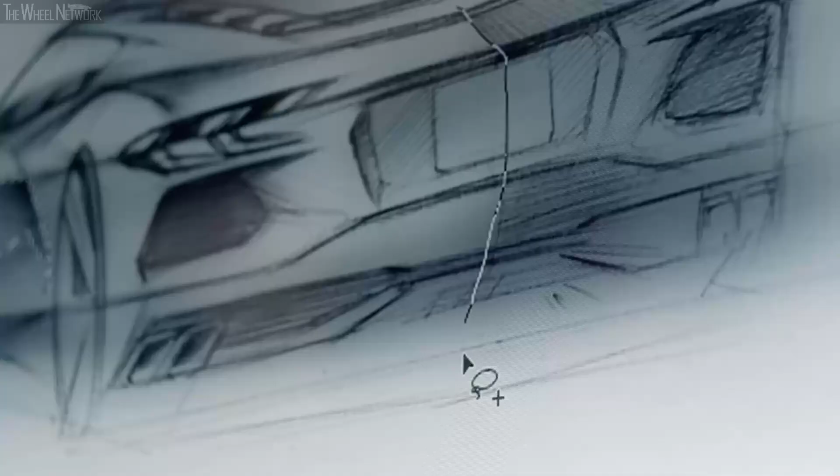For us, the cars are so fast, the aerodynamics are really a safety issue. It's not like you can just pen any design and then just apply it over the rest of the body. So doing thumbnail sketches, early ideas, helps us understand the lay of the land more or less, the opportunities

that we have within the aerodynamics of this car. When you look at the new mid-engine Stingray, you can see the effect of aircraft design. Lean, purposeful surface development, and in particular the aerodynamic aspects. In terms of the three elements that play a part in that: drag, which is the efficiency of air going over the surface, cooling, and then downforce, keeping the vehicle stable.

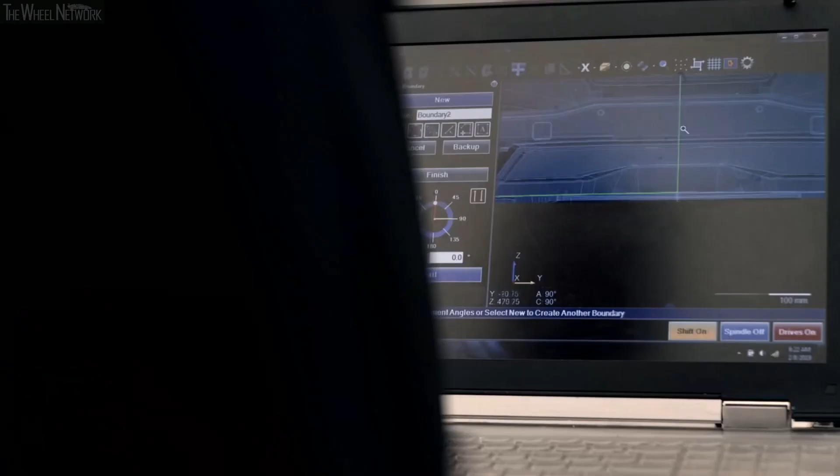Those fundamentals were real important at the beginning. And once you nail those down, then it kind of gets into more of the sculpture of the car. We see the car evolving, and we have this great process where it's part art, so hand sculpting clay, and part digital math-based design.

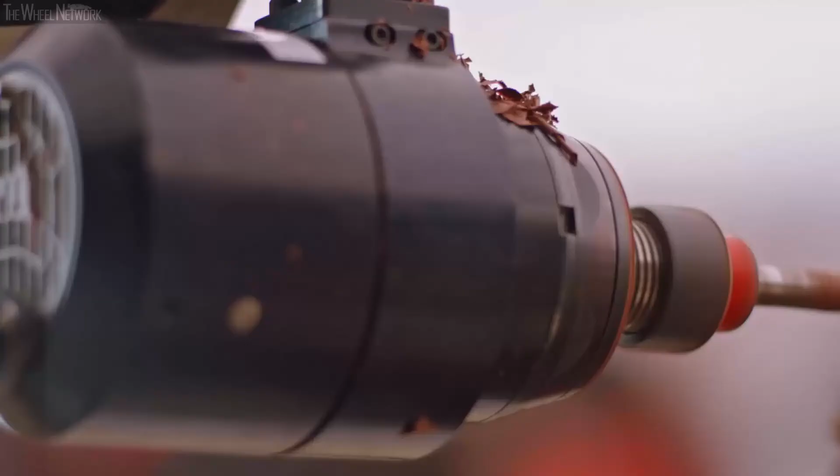So we sculpt the car, then we scan it, and then we'll use numerically controlled machines to recut that surface back on the clay. You go back to the sculptors, and they go start finessing the car, change the surfaces, make them blend together the way you want.

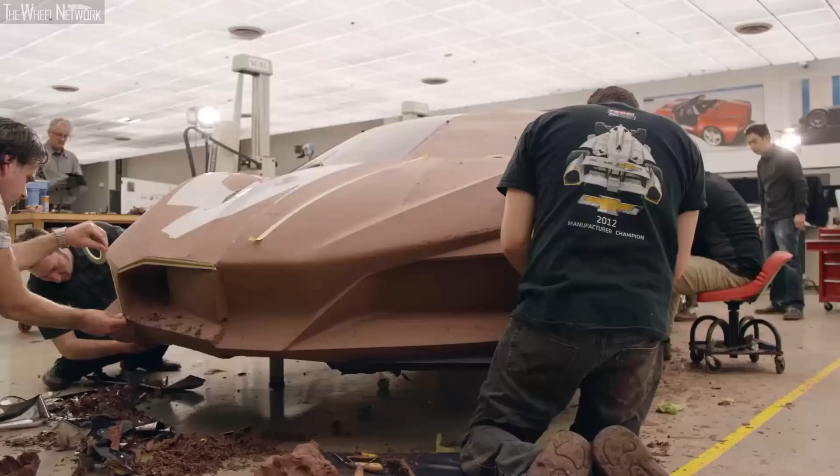We started at the very front of the car, and at the very center of the front of the car is your highest wind velocity. We don't want a bunch of air under the car because that creates lift, so we have a bunch of air dams. This next car will have a hybrid front splitter that touches down in the middle and then flows air under it on the outboard corners.

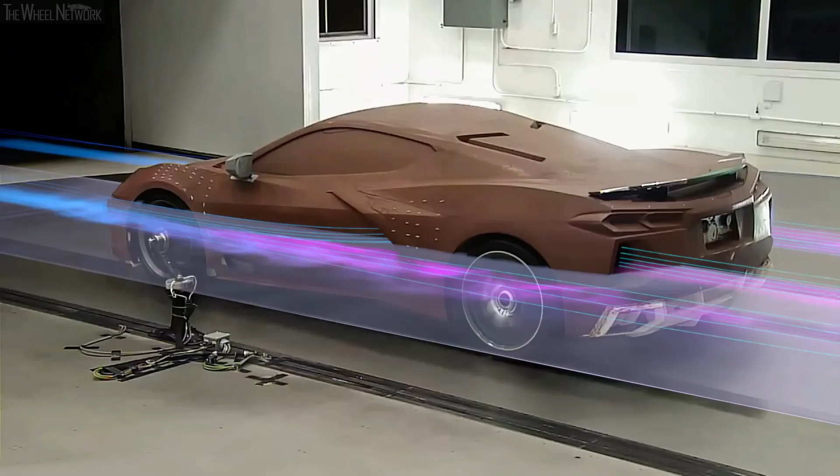Developing the aerodynamics, there are things that we do so that we can see the cause and the effect. The Corvette has heat exchangers tucked away behind all of the openings. The air runs down the side of the car, and then we actually pump that air through the engine compartment, and it's evacuated through the rear wheel openings underneath the car and through vents that we have added to the hatch.

It doesn't look like there's any fat in the car at all. All the surfaces are pulled as taut as possible over the mechanicals underneath. And that gives the car a real dynamic energy, something that draws people to it visually.

Everything is new about this car, and of course, for design, we want to leverage that. As we watch the car evolve, we see the themes coming out. We see the car move towards its production shape.

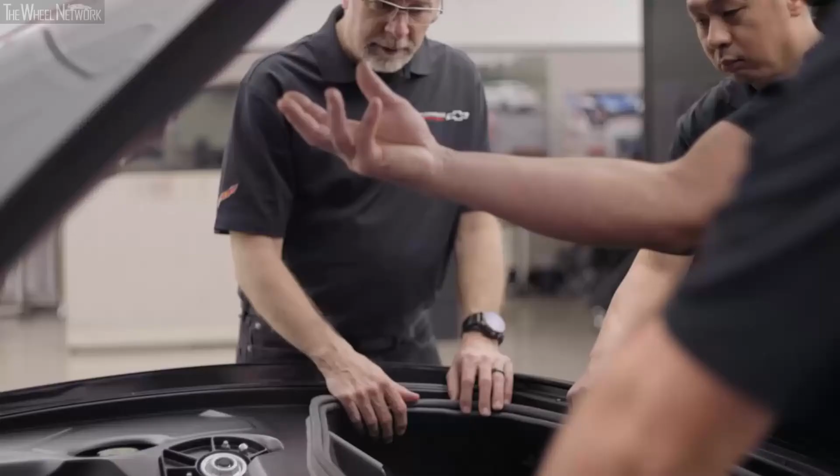We left no stone unturned. We were constantly asking ourselves, could we make something newer, better, more unique? It still had to have the feel and look and maintain the brand Corvette, but we had to do it in a new and unique way.

When I come in and see the sculptors and designers and engineers working around the clay model, stepping back, it's like watching a symphony orchestra with the interplay between all the different people to create a unique personality, a character, a soul for a vehicle that people will absolutely resonate with and love.

Near-field communication, Apple CarPlay, Android Auto, and Bluetooth are all different ways you can seamlessly connect your smartphone to Corvette. Pair your phone to Corvette's Bluetooth by tapping on the phone icon on the center infotainment screen, and then Add Phone. Press the Press to Talk button and say Pair Phone to bring up this menu with your voice.

From your phone's Bluetooth settings, select the name shown on the infotainment screen. Follow the pairing instructions, and then the phone screen will appear when pairing is complete. Utilize near-field communication, or NFC, by unlocking your smartphone, enabling NFC, holding your phone next to the NFC icon above the volume knob, and then following the on-screen pairing instructions.

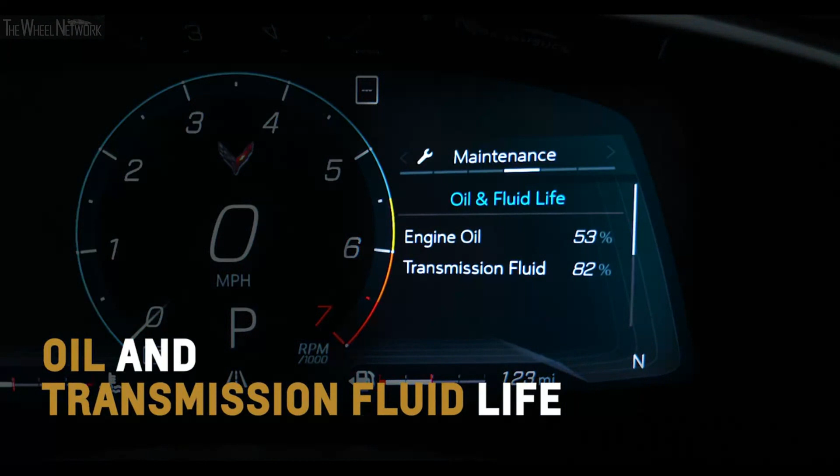Initiate the Performance menu and gain access to a 0 to 60 timer, lap timer, and friction circle to show inertia being exerted on the vehicle. Select Audio, and the thumb wheel will act as a seek control to switch between stations and songs. Choose the Maintenance menu to see oil and transmission fluid life, available air filter, and engine life.

Open the Options menu and select Display Design to scroll through the different themes and gauge layouts, such as Tour, Sport, Track, or Weather. Press the thumb wheel to select a desired theme. Rotating the driver mode control knob will bring up specific themes linked to each drive mode. You can also configure your favorite theme to display during all drive modes or when activating Z mode.

Choose Info Tile Selection from the Options menu to scroll through the available info tiles. Press the thumb wheel to select tiles you want to appear on the instrument cluster for a catered driving experience. Track Display offers 4 tiles, while other layouts offer 2. Return to the main menu and select Simplify to engage a streamlined appearance, displaying only basic information.

Project additional data on Corvette's windshield with the available head-up display, or HUD. Lift up or press down on the HUD button toggle left of the steering wheel to adjust the position of the image. Press the Info button to cycle through Tour, Sport, and Track display views. Lift up or press down on the Brightness button to brighten or dim the display. Hold down this button to turn off the display. For more information, refer to the owner's manual.

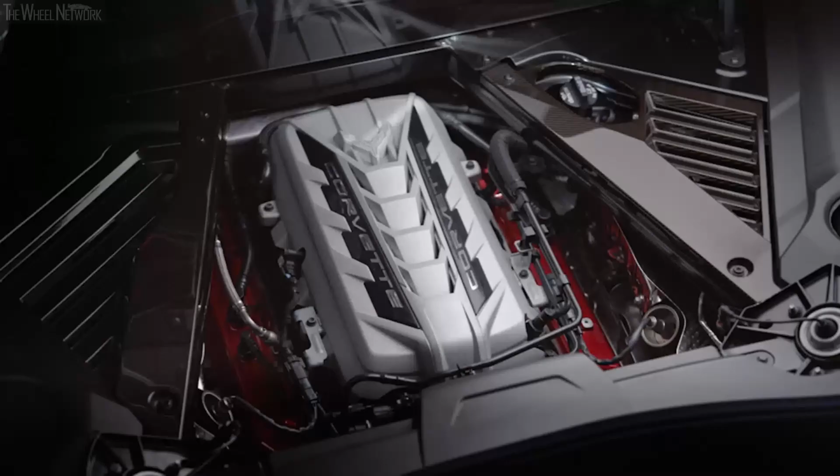Let's start with Z Mode. My favorite mode is the new Z Mode. That allows you to go into the infotainment screen and set each parameter, and then it can be activated with a simple push of the steering wheel button. You can personalize almost every aspect of your experience by configuring subsystems including engine sound, steering, powertrain, and brake response.

You may also have available magnetic ride suspension. Z Mode is set from the factory with a combination of sport and track settings. To activate Z Mode, press the button here on the steering wheel. To deactivate, either select a different mode through the mode knob, or press the Z Mode button again, which will set it back to Tour mode.

My Mode is very similar to Z Mode, but lacks the powertrain configuring. It will let you home in on what feels best to you for everyday driving. My Mode is set in Tour settings from factory, but can be adjusted under Settings on the center screen. Mode features will vary depending on your Corvette's equipment.

You think of a car like the mid-engine Corvette and performance cars in general, the expectation for what that car is gets set so high by the exterior. And as the interior design team, you really want to deliver on that promise. We wanted to take the interior the next step beyond what we've done before.

This time now you're literally sitting in that cockpit. The controls are wrapping around you in all directions. I think this car takes that to the next level — it really surrounds you.

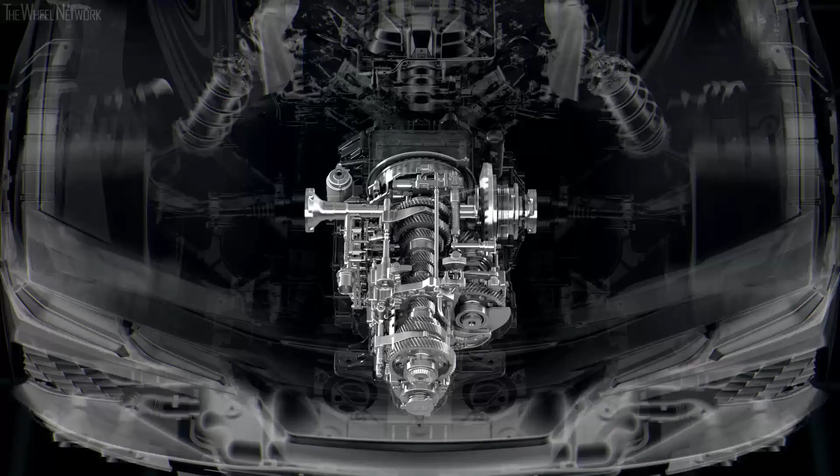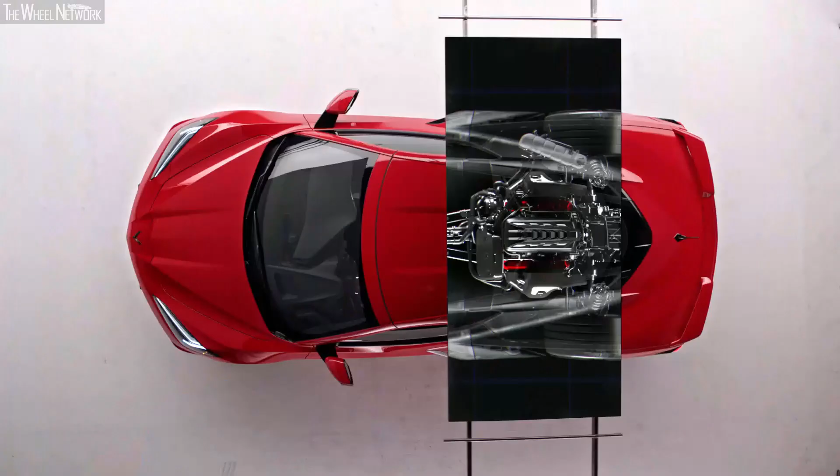In a traditional car, while you're shifting, the car is actually decelerating because the engine is not connected to the wheels. So we said we needed a bespoke transmission, custom designed for this car, because we have engines that produce massive amounts of torque, so the DCTs that are on the shelf wouldn't stand the Corvette duty cycle. The transmission team worked with the chassis team to fit the transmission into a package that allowed us to essentially lower the center of gravity, which helps in overall performance.

A dual clutch transmission is effectively 2 manual gearboxes that have clutches actuated by computers on a concentric shaft. So what that really means is you've got a shaft that has your even forward gears, 2, 4, 6, 8, and your odd gears, 1, 3, 5, 7. You can simultaneously be disengaging one shaft while you're engaging the other one, so it's quicker than a human being could shift a manual transmission. This way you get the lightning fast, less than 100 millisecond shift when you need it.

We've also found that during very aggressive launches, we can actually drive torque through both shaft clutches simultaneously. So you'll be on an upshift engaging third gear, but still driving torque through second as you're engaging third. This actually improves the 0 to 60 performance of the car beyond what you could achieve in a manual transmission.

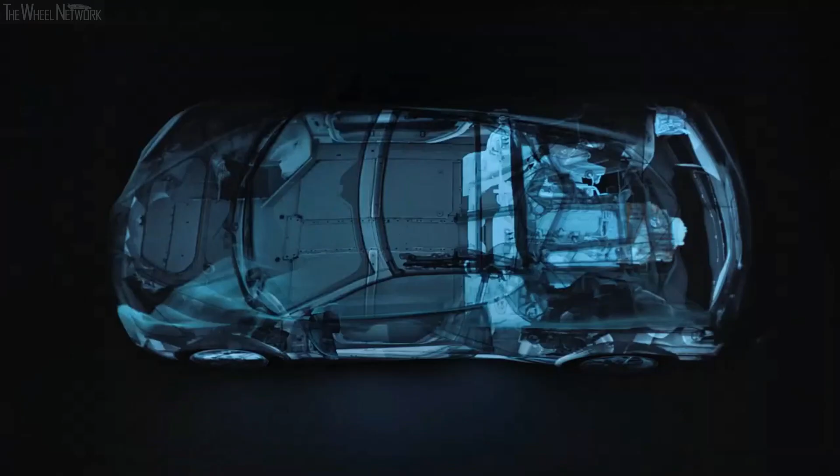Control is yours for the taking. Manual paddle shifting will give you full transmission control for your driving experience. With the vehicle in drive, press the M or manual mode switch on the center console. Use the paddles here and here on the steering wheel to manually upshift or downshift the transmission. Your current gear will be displayed on the instrument cluster or the head-up display if your Corvette is equipped with one. Hold the down paddle to shift multiple gears to the lowest available gear for maximum acceleration.

The manual paddle shift system will not allow an upshift or a downshift if the vehicle speed is too fast or too slow, nor will it allow a start from any gear other than first gear.

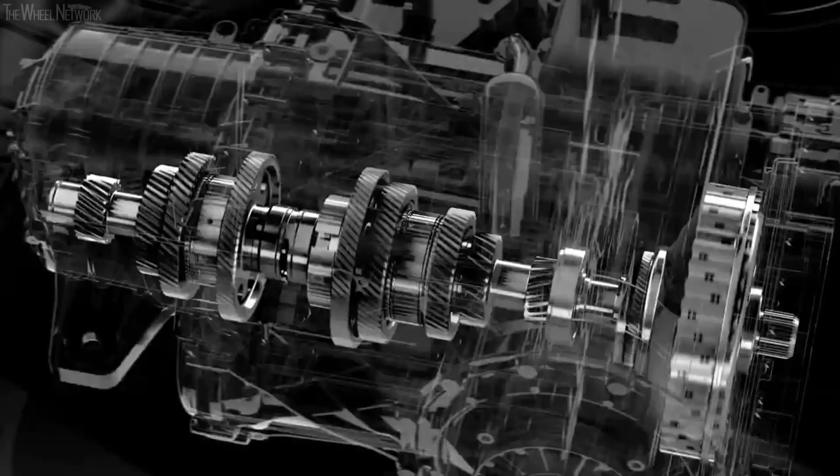When in manual paddle shift mode, if upshifting does not occur when needed, the rev limiter will activate to protect the engine. To prevent damage to the powertrain, manual paddle downshifts to a lower gear cannot be done above certain speeds. It's going to just act just like a normal automatic transmission if you want it to.

So if you just want to drive around town in heavy traffic or anything else, just use the automatic mode for drive. It's just going to act like a normal automatic transmission. If you want to drive more spirited, there is a manual mode that will sit there and hold the gears until you want to shift,

and it'll act much more like a typical manual transmission would. Double paddle declutching allows the vehicle to temporarily disconnect the engine from the wheels, similar to neutral or engaging the clutch pedal on a conventional manual transmission. This feature is activated by pulling and holding both the plus and minus paddle at the same time while the vehicle is in reverse, drive, or manual mode. The vehicle will remain in this condition until both the plus paddle and minus paddle are released.

I really like the double paddle declutch. That just gives you the true feeling that you're still driving a manual sports car. If you really want to sidestep the clutch or anything else, if you want to rev the exhaust at a friend as you're driving by them, that gives you the nice feeling that you're still in the sports car.

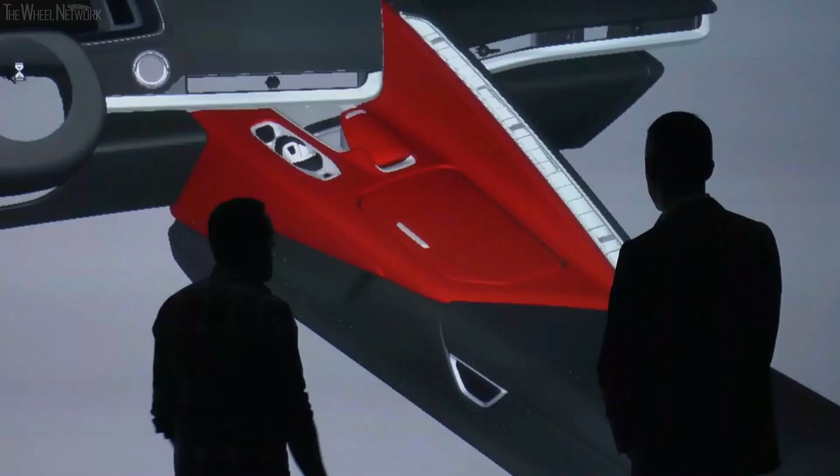One thing we're really proud of is our electronic transmission range select, what you normally think of as the lever that goes from park, reverse, neutral, drive. We wanted to come up with a design that really was fundamentally intuitive to use. So we've got two toggles that you're going to interact with the most, your reverse and your drive. Both are pull toggles, and they're almost mirrored versions of each other.

The challenge with electronic controls is how do you make them feel mechanical? How do you make them feel real? So we came up with a really unique geometry that can be felt like it's Braille. Once you get used to it, which doesn't take very long, it's extremely intuitive.

And now you have a very modern, sleek center console that actually frees up more space for the things you're probably going to be carrying with you. The electronic shifter was also really important for us in the sense that making sure that it had movement to it. It wasn't just a simple button.

We wanted to make sure it didn't feel like anything else in the rest of the car. It shouldn't feel like a window switch. It shouldn't feel like a button on your volume there. It should be its own special control the same way a regular shifter is on another car. For us, this was that push to do something new and unique and something that would be completely unexpected, yet again feel uniquely Corvette.

Electronic Limited-slip Differential, or ELSD, was in the previous generation, the C7 Corvette. And so we've taken all that software and kept fine-tuning it and refining it. It's basically like a clutch between the two rear wheels. So we can open that up and then they can roll independently. So if you're going around a corner, the car is super agile.

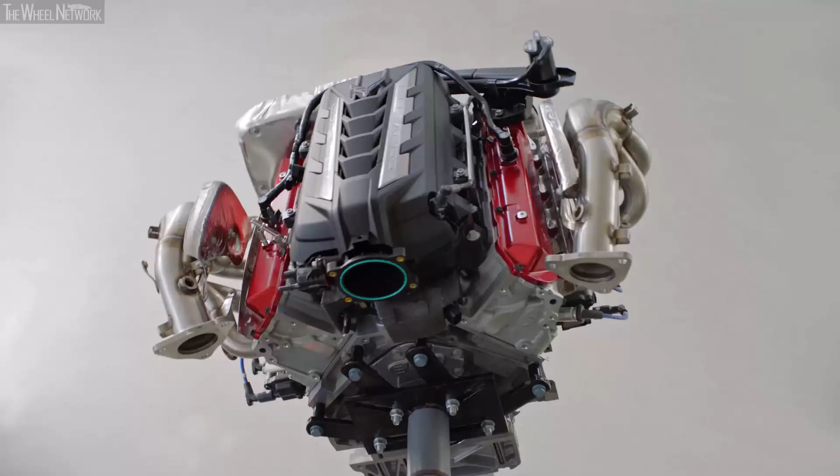That tornado of wind causes the oil to froth. With a dry-sump system, it also gives you confidence that you can take the inertial loads you encounter on a track—the oil sloshing around in turns or over heaves—and really make sure you can maintain oil pressure at the critical lubrication points in the engine while you're really working it hard and working it hot.

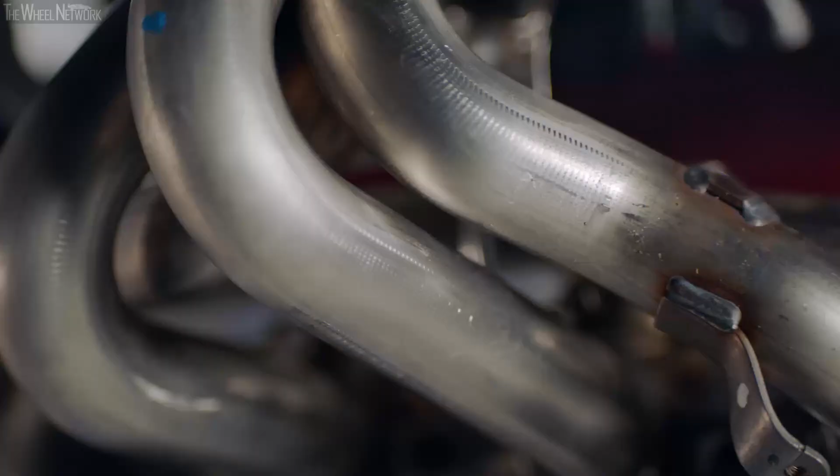The reason we made it standard in this generation car is it allowed us to lower the engine and transmission as low as possible, and this really lowers the center of gravity of the car, which helps in handling.

That lower position enables us to mount directly to the new DCT transaxle, giving direct alignment so we can take the energy from the engine and transmit it directly through the transmission into the rear axle.

Corvette never disappoints. All your worries go away with one strike of the accelerator pedal.

Avoid the pain of an obstacle with the push of a button. Speed bumps, steep driveways, and more can be overcome with available front lift. If your vehicle is equipped with this available feature, be sure you're going no faster than 24 miles per hour.

Front lift is an optional feature on this vehicle. It's a two-stage hydraulic lift where, with the touch of a button, it will raise the front end of your car about 2 inches in under 3 seconds. Once you're over the obstacle, press the button to lower it, or it will lower on its own once you've exceeded 24 miles per hour or turned the vehicle off.

The system can remember up to 1,000 locations using the GPS navigation in the vehicle. During a driver-requested front lift, use the 4-way pad on the steering wheel to remember or dismiss that location. The same 4-way pad is used to delete a stored location.

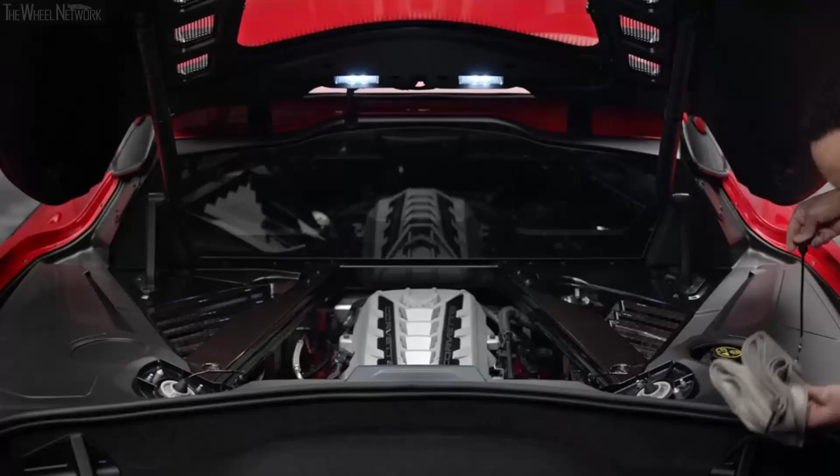Walk back to the engine compartment, grab the dipstick, wipe it clean, reinsert it into the tube, pull it back out, and compare it to the hash marks on the dipstick. If the oil is below the cross-hatched area, add a quart of the recommended oil through the oil fill cap opening here, then recheck the level.

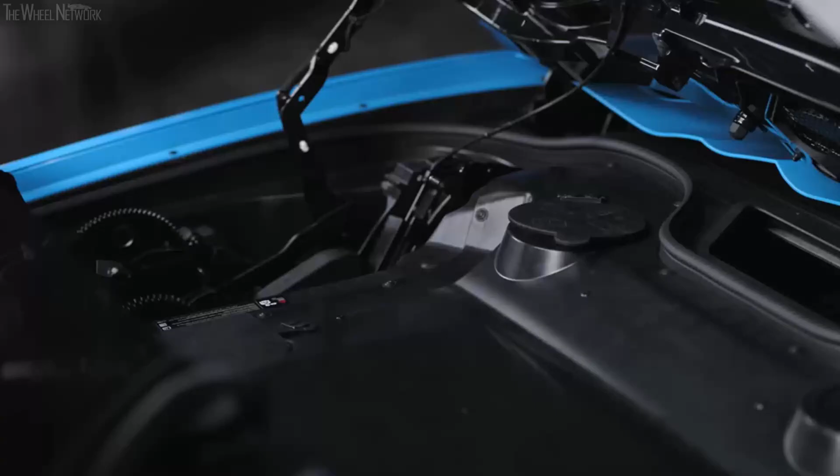For convertibles, press lock and the convertible top buttons on the key fob to open the tonneau and access the oil fill dipstick and coolant fill covers. Make sure the covers are sealed after use. Using engine oil approved to the proper specification and viscosity grade is crucial.

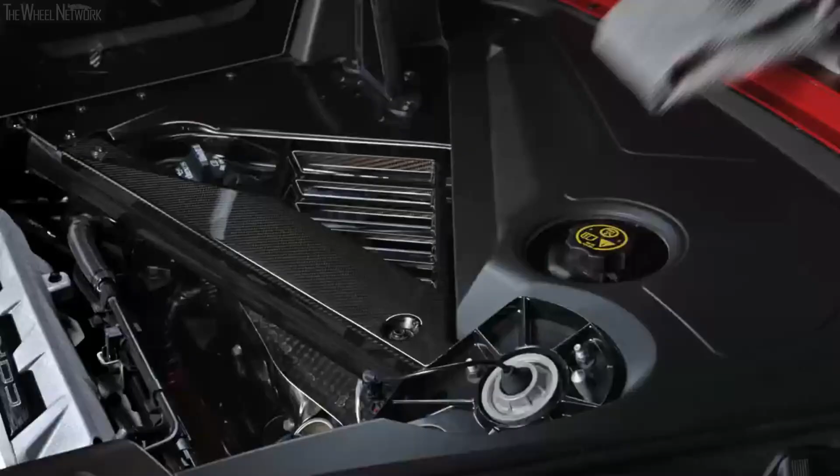To check your coolant, be sure the system is cool and that the vehicle is on a level surface. Check to see if coolant is visible in the coolant surge tank. If the coolant inside the tank is boiling, do not do anything else until it cools down. If the coolant is low, add the precise mixture of 50% Dex-Cool coolant and 50% clean, drinkable water, or take the vehicle to your dealer for service.

The wiper fluid reservoir is located here. If you'll be using your Corvette in temperatures that may fall below freezing, use a fluid that has sufficient protection against freezing.

We've been walking you through things on this coupe, but a convertible is laid out a little bit differently. You check the oil here, the coolant here, and the wiper fluid is in the same place, under the hood. We know that a lot of customers enjoy working on their cars, and we try to make the Corvette no exception to that.

Touch, pinch, and swipe an app on the standard high-definition 8-inch diagonal touchscreen, and Corvette's next-generation infotainment system responds with immediacy. If equipped, touch the navigation icon to gain access to available connected navigation services such as real-time traffic, up-to-date points of interest, local fuel prices, and parking options.

Predictive navigation also learns your preferred routes and destinations to offer curated alerts utilizing OnStar, such as traffic on your route home. Plug in your compatible phone to utilize Corvette's standard Android Auto and Apple CarPlay capabilities.

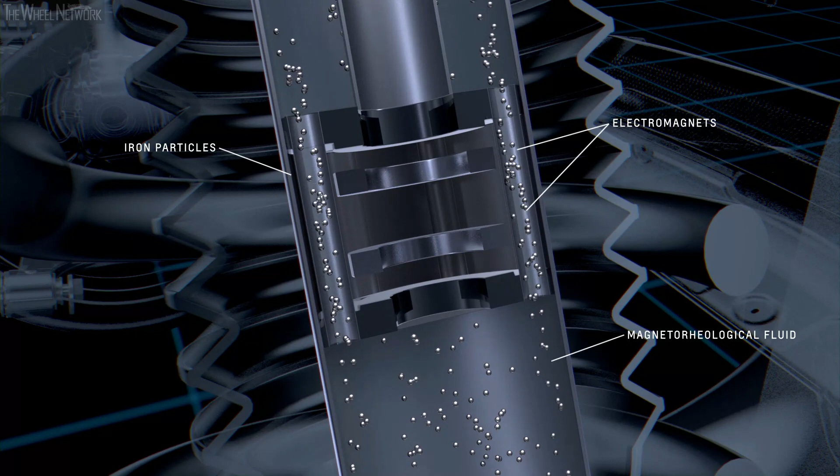The magnetic ride control is something that's been around for quite a while now. We're now on the 4th generation. This is a semi-active system where you replace all the valving, the ports, and the shock oil with iron particles that you can change the orientation of by applying a current.

The most obvious difference is the ability to change the way the car reacts to both driver inputs and road inputs. It can be a very relaxed car, where you're not feeling every bump in the road. You go to sport mode, and it moves everything up a notch - the car becomes a little more taut, a little more connected to the road. It's a track day, and you go to track mode - it's got all that additional capability for those type of events too. But the control is there when you want it, and it's gone when you don't.

With the vehicle on and in park, adjust the driver's seat, power outside mirrors, and steering wheel if equipped, and then press the Set button. Release the button after a beep emanates. Immediately press and hold the 1 or 2 memory button until 2 beeps sound. Use the Exit Memory button instead to store seat and power steering column positions for more clearance when exiting the vehicle. Repeat these steps to set additional driver or passenger side memory seating positions.

Tap Settings on the center infotainment screen, Vehicle, Seating Position, and then Seat Entry or Exit Memory to further configure automatic seat movements to your liking.

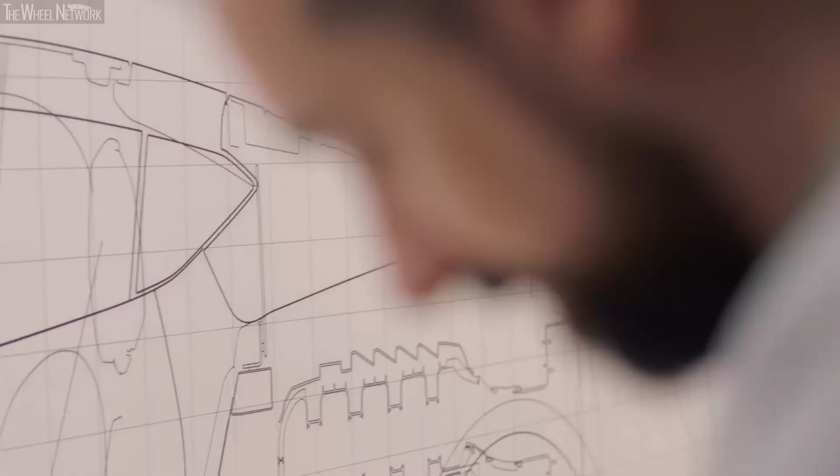It's an interesting bit of history to look back and see how we decided to move away from our comfort zone and started working on a mid-engine car. I think a lot of the leadership thought we want to go mid-engine because it's cool, because the most exotic sports cars in the world were mid-engine. But actually we were doing it because we felt like we were reaching the limit of our performance capability in the architectures that we had, and so we had to do something to move that forward. We put together the compelling arguments why it would make sense to at least study.

We ended up presenting to a lot of top leadership to get a critical mass of them on board to say, you know what, these guys might be onto something.

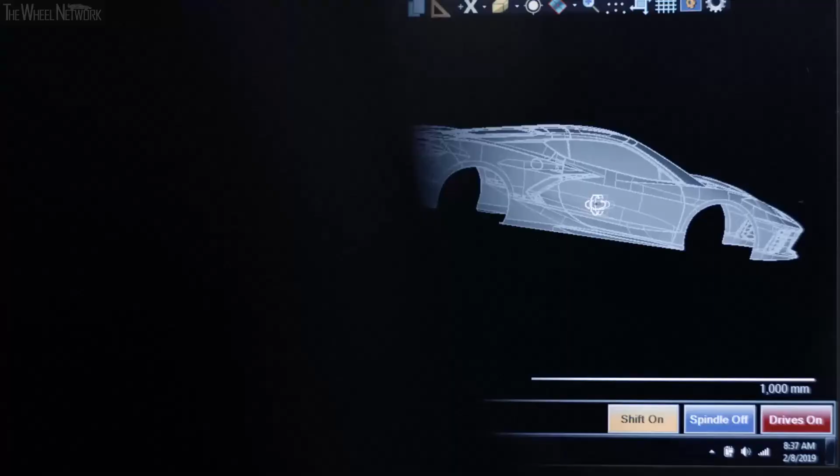When I first heard that they were gonna make the new Corvette mid-engine, really it was a game changer. The easiest way to describe it in a single word would be frightening. It's a daunting responsibility. We've had such success, and here we are making this fundamental shift in the car that if we don't do right, we potentially do something terrible to this great legacy of a brand.

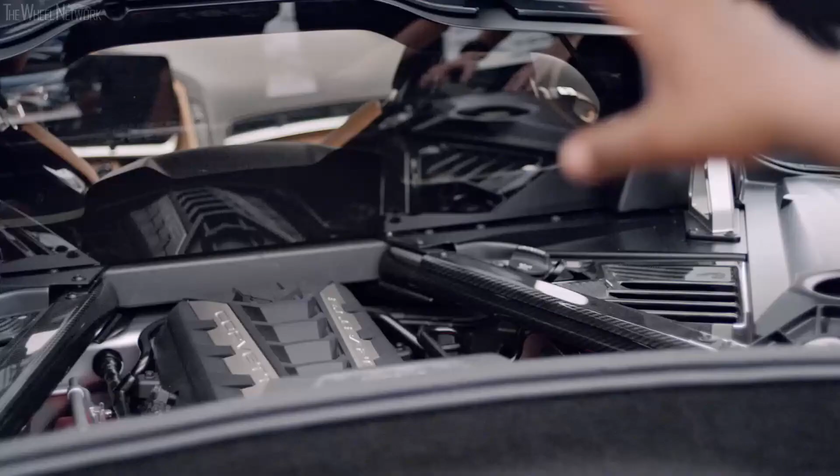We're bordering on 70 years of this vehicle. So you have this lineage to it that you have to maintain, but you also have to be willing to grow and take it further. From a design standpoint, the vehicle had to be incredibly beautiful, and at the end of the day, when you step back and look at it, it has to say Corvette.

Everything's backwards on a mid-engine car. You can't move one thing in the inside of the car without affecting a whole bunch of other things. When you put the engine in the back, you actually want to think about moving stuff forward. So to get the right amount of weight on the front, you actually have to move those front wheels rearward.

From the driver's perspective, having less weight on the front wheels means you need less boost in the steering, which means more tactile feedback, so more direct steering. You're not sitting out in the periphery and the car rotates about a point distant from you. The car is rotating about you, and that's a very different driving experience.

With the mid-engine attributes, you'd have the rear weight bias from the engine for better acceleration, performance, and track times, as well as the low forward cowl for excellent visibility, and the lighter front, which really makes the car fun to drive. That helps for driver confidence. It helps to get the car around the track safer and faster.

Corvette prides itself on being a very light, very stiff vehicle, and we from the beginning said we want to take the Corvette formula and apply all that goodness to a mid-engine architecture. We didn't want to fall into the trap where the car gets hard to drive, and that's been the problem we've been working to solve for the last 14 years.

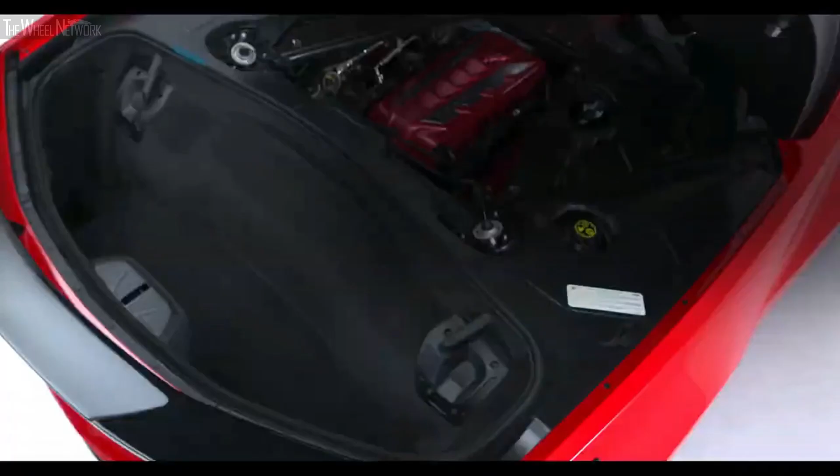Open the hatch by pressing the touchpad above the license plate, the hatch release button twice on your key fob, or the interior button on the driver's side door panel. Here you can store additional luggage, two sets of golf clubs, or Corvette's removable roof panel. Pull the hatch down lightly until the power latch feature activates, closing the trunk automatically.

Open either door with the key fob on you and tap the touchpad tucked under the air inlet. Inside, a hidden button in front of the passenger seat reveals a generous glove box to store smaller items. Place your phone between the seats in Corvette's dedicated compartment with available wireless charging. Other storage areas in the center console, door panels, and center armrest make Corvette an ideal grand touring vehicle.

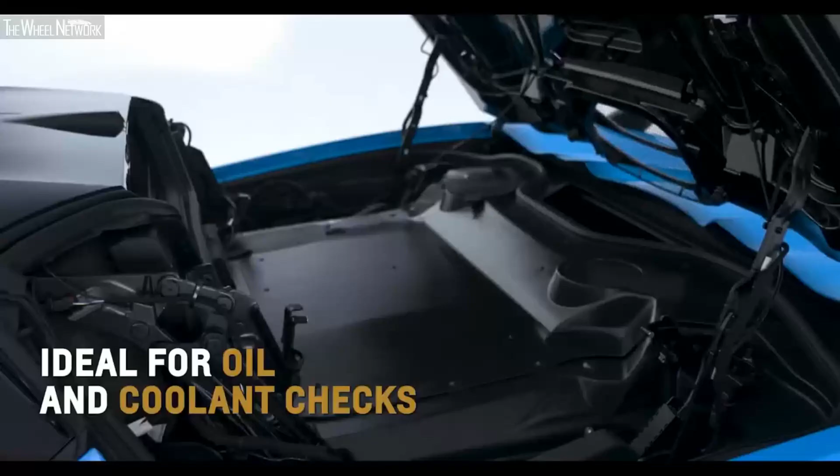Remotely lower the top by pressing and releasing the unlock button, and then pressing and holding the convertible top button on your key fob. Raise the tonneau cover by pressing the lock, and then the convertible top button on the key fob. Ideal for oil and coolant checks or fillings.

Raise the top by pulling and holding up the convertible top button on the driver's door. A chime will sound when the top is completely raised, offering added security and quietness while retaining Corvette's signature shape and beauty. For more information, refer to the owner's manual.

Before removing Corvette's roof panel, shift into park. Lower both sun visors and windows. Turn the vehicle off, and then set the parking brake.

Open the rear hatch and remove any items that may interfere with proper storage of the roof panel. 3 release handles detach the roof panel, 2 above the sun visors and 1 at the rear of the panel.

Pull each front release handle outward to unlock. Then press the button on the front of the rear lever. With 1 or 2 people, carefully lift the front edge of the roof panel up and forward. Once loose, grasp the center of the roof panel and lift it away from the vehicle.

Conveniently store the roof panel in the rear of your Corvette with the interior facing forward and rear edge entering first. Position the rear pins into the lower receivers. Push each front corner of the panel forward until it clicks into the upper receivers.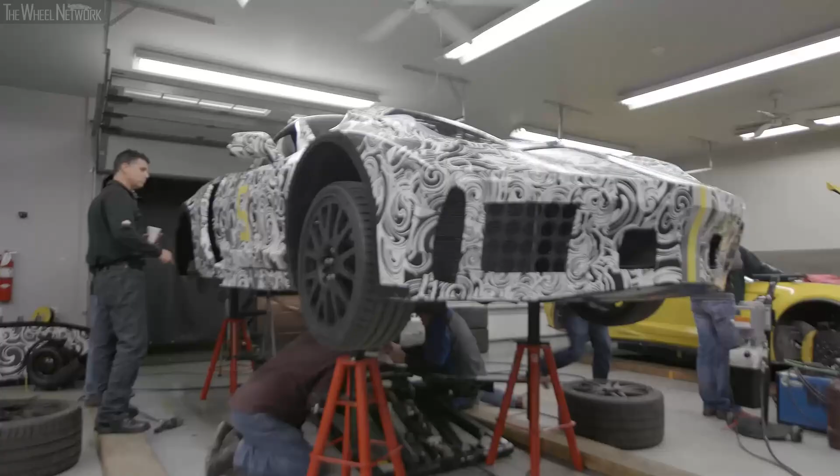When we finally got to the track with real physical hardware, some of us were holding our breath. We were a little bit nervous. The first drive in the car wasn't honestly the most inspiring thing. There's a lot of work we have to do. We will often break things that we honestly didn't expect to break.

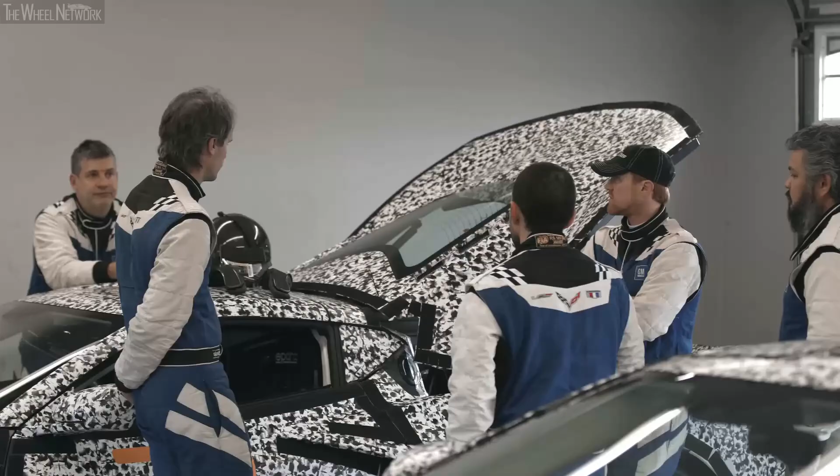Track testing really is the essence of what drives our team to achieve things we haven't in the past. If you have a deep relationship with the car that you've developed on the racetrack, where you've pushed it to and beyond its limit, you find it opens up this whole window of your brain where you can feel things happening in the car that you would never notice before.

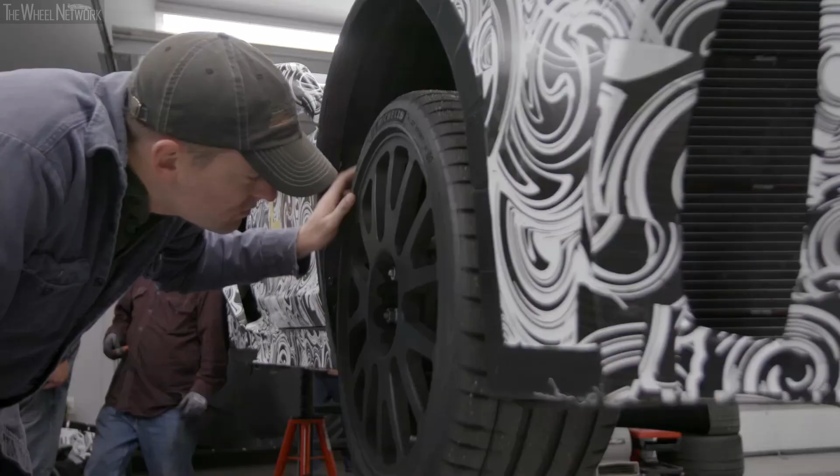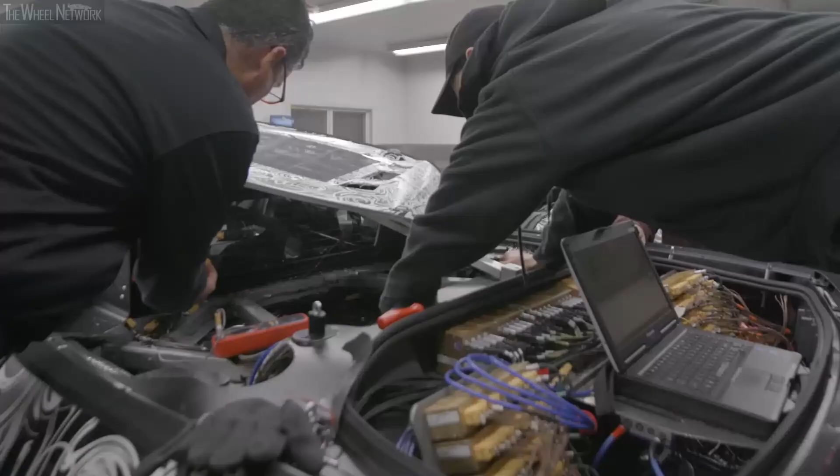If you talk to our ride and handling engineers and our chassis control engineers, they live in that car. That is their office space. That's literally where they go to work every day. So the big thing we had to adapt to was our tuning style and how we adapt to a new center of gravity location and how we can take advantage of all the rear tire that this car has.

Been on different test tracks and had a chance to slide the car around, drift it a little bit on our vehicle dynamic test area. That was very exciting. I've had a chance to ride along on our durability test where we really punished the car on Belgian blocks and gravel roads and thousands of miles of stuff that a normal Corvette owner would never subject their car to. I've had a chance to be in the car at our cold weather test site on ice and snow where we're challenging the stability systems and chassis controls to deliver great performance.

And you think about, it was just a couple years ago, we were looking at some computer renderings on a screen as the initial bones for the car. And here it is, a very compelling 3-dimensional machine working at this level. And it was just, it was sort of for me the point that I know we had really completed the mission that we had set out to do.

About a month ago, we were at the track, and I thought, well, this is the last time this is going to be a new thing for me. This is when I get out of the car in 45 minutes after a tank of fuel, this is going to be the Corvette. And it's not going to be the new Corvette, it's going to be the Corvette. That for me was the moment where I saw the real light switch on the mid-engine architecture, was that it's just so easy to be fast and to have fun.

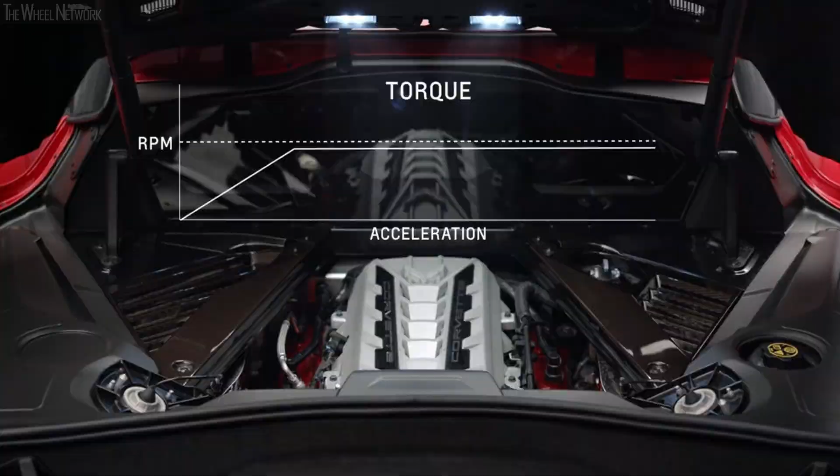The first 200 miles are for breaking in your tires and brake linings, so drive at moderate speeds and avoid hard cornering and hard stops. During your first 500 miles, engine torque is limited in low gears. If you have a brand new gear and you're wearing it in with excessive torque, you can create wear patterns that are not ideal. Avoid full throttle starts, abrupt stops, and driving at constant speeds, including the use of cruise control. You shouldn't exceed 4,000 RPM, but if you do, don't downshift to brake or slow the vehicle.

During your first 1,500 miles, you should check the engine oil every time you refuel and add oil if necessary. Oil and fuel consumption may be higher than normal during the break-in period. Wait until you've passed 1,500 miles to participate in track or sport driving events of any kind. For more information, there are many resources available to you on Chevy.com and in your owner's manual. And once you've passed 1,500 miles, the break-in period is over. Be patient with it, and if you are, the car will be good for the rest of its life.

Basic maintenance, in some ways, is even easier than previous generations of Corvette. While the car is a mid-engine supercar, we want to make sure that costs of ownership and maintenance are not supercar territory.

Such a beautiful machine should be lovingly cared for. Oil changes and transmission fluid checks can be done by your dealer's trained service people. If you plan to do your own oil changes, you'll find Corvette was designed with easy access openings under the car for the oil drain and filter, so the closeout panels do not need to be removed to do an oil change.

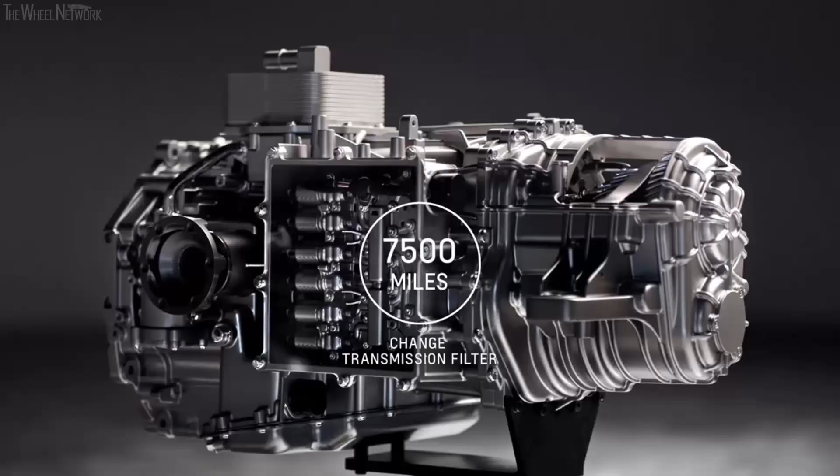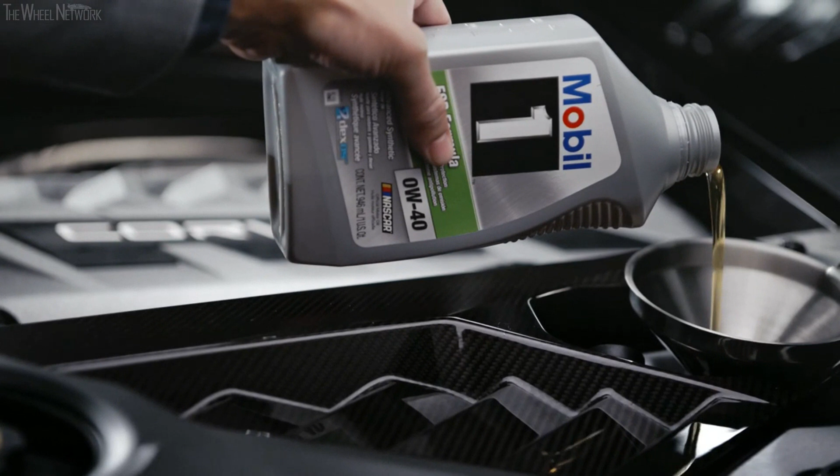Factors including temperature, miles driven, and driving conditions can cause the fluid life to vary. The transmission filter must be changed during your first oil change. Transmission fluid should be changed at 45,000 miles. A computer indicates when to change the oil or transmission fluid. When that happens, it's best to have the work done as soon as possible. One of the best ways to take care of your new Corvette is to let your dealer help.

The Z51 is a performance package that takes the goodness of the Stingray road car and elevates it to a hardcore racetrack beast. The Z51 package includes a lot of performance-enhancing items, like tires that are more racetrack-oriented, larger brakes, a Z51-specific front splitter and a Z51-specific spoiler. The electronic limited-slip differential is a huge performance enabler, and it goes on and on.

Seeing the Z51 package at work is amazing because we've already exceeded where the current car is. We've got the Z51 now to a level where we're in new territory for the car. We're positioned to rock the world with this one.

When I was about 10, a neighbor of ours had a '67 Corvette. To me, it looked like a spaceship. It was astonishing, the sort of visual and emotional power that car had.

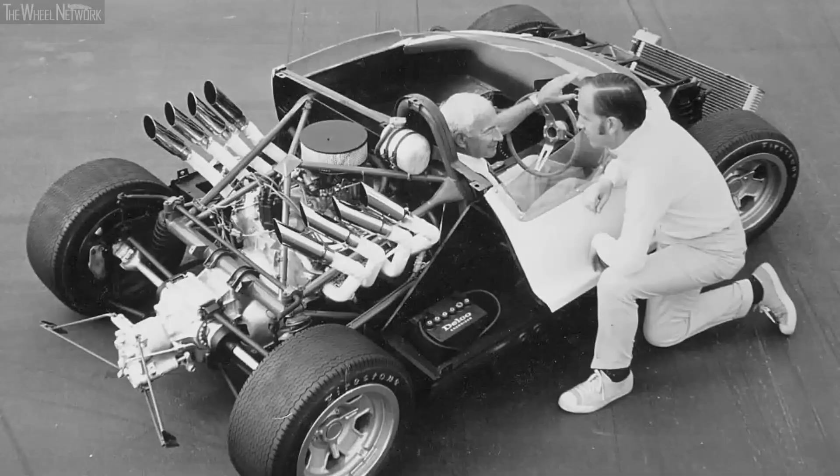You think of the history, the people, the mystique of the car. We're reaching back to the past, to these other automotive legends that started this journey. We're simply taking the baton and taking it across the finish line.

One thing we knew when we started studying a mid-engine car in earnest was that it was possible to do a mid-engine car, but is it going to be easy enough to live with? Is it going to have a reasonable amount of luggage? Is it going to be loud? You've got an engine inches behind you. So for us, it was like, how do we deliver that exotic hypercar experience and still make it feel uniquely Corvette?

Corvette is more than just a vehicle. It's a lifestyle, it's a feeling, it's an element of passion that I think transcends not only time, but generations and cultures over the course of its life.

The thing that was striking was when we parked the new car next to the old car. We weren't really appreciating the distinction between what we had, which was really excellent, and where we were going, which was really unbelievable.